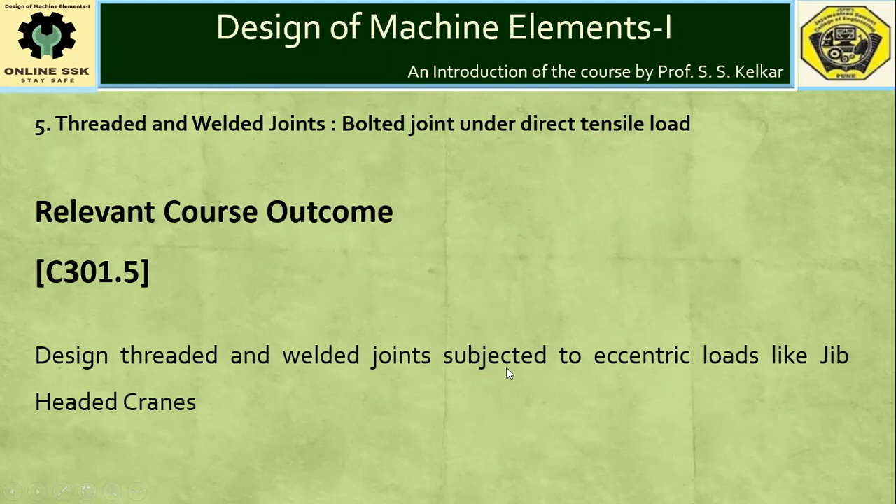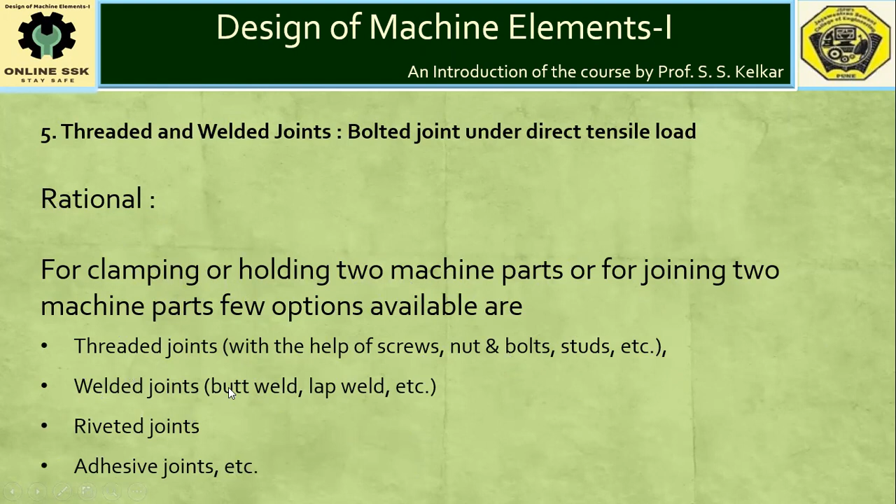Now, as far as joining of two machine parts is concerned, if we want to clamp or hold two machine parts together, there are a number of options. Famous of those are threaded joints, welded joints, riveted joints or adhesive joints. Nowadays, adhesive joints are getting popularity, but threaded and welded joints are the most common ways to join, hold or clamp two machine parts together.

Threaded screws are used for two different purposes. One is the power screw to apply the load, to sustain the load, or to lift the load, or to convert rotational motion into translational motion. This is covered under unit number 4, comprising power screw applications.

Whereas threaded screws are also used for joining or clamping two machine parts together. For that, threaded screws in the form of nut and bolts, studs or screws are used, and that is called threaded joints. Here, a stud can be considered as a bolt having no head. If no head is provided, then the bolt itself will be termed as a stud.

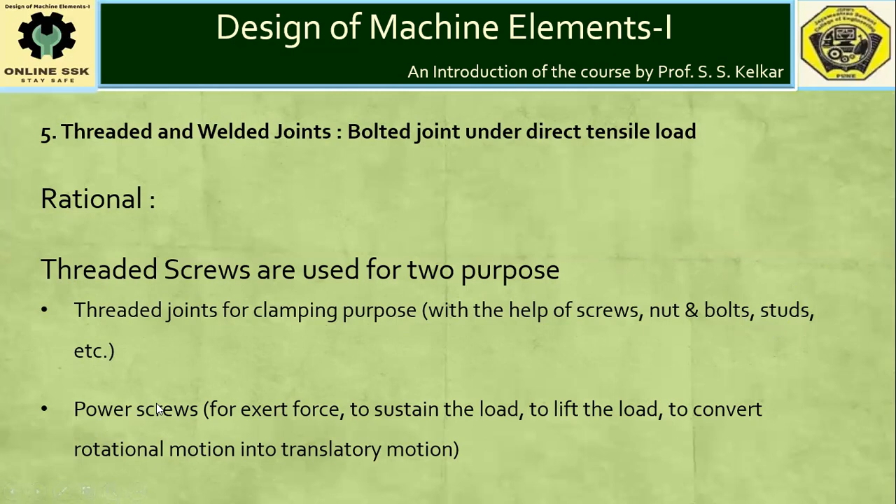As far as unit number 5 stipulated in our university syllabus, they have stipulated four different types of threaded joints: eccentrically loaded bolted joints in shear, eccentrically loaded bolted joints wherein the eccentric load is perpendicular to the axis of the bolt, eccentrically loaded bolted joints wherein the eccentric load is parallel to the axis of the bolt, and bolted joints subjected to tensile loads.

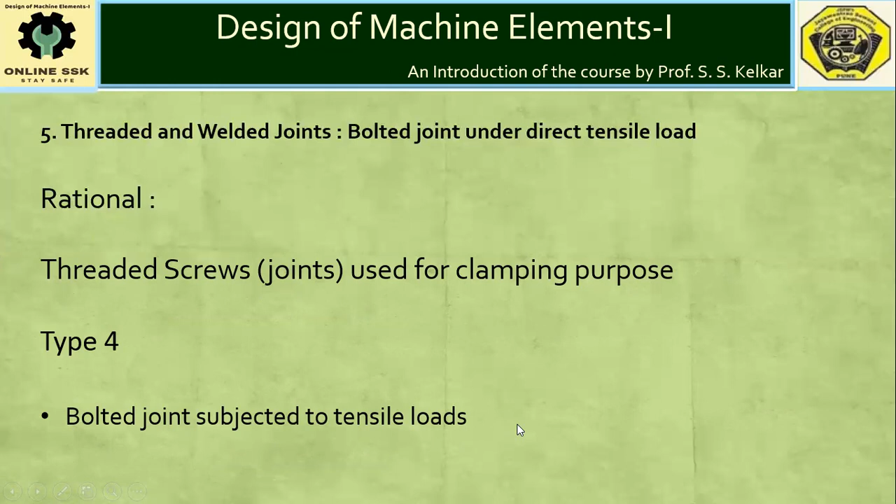This fourth type we are going to discuss in today's video tutorial. Type number 4, bolted joints subjected to tensile loads. How to analyze a bolted joint subjected to tensile loads, that we are going to discuss today.

Bolted joints are very common. If we say bolted joint, the very first figure that comes to mind is the joint required to join the flange of the cylinder with the head of the cylinder. The head and flange of the cylinder are joined with the help of a bolted assembly. A number of bolts are used over the periphery of the cylinder head, and this bolted joint assembly is used.

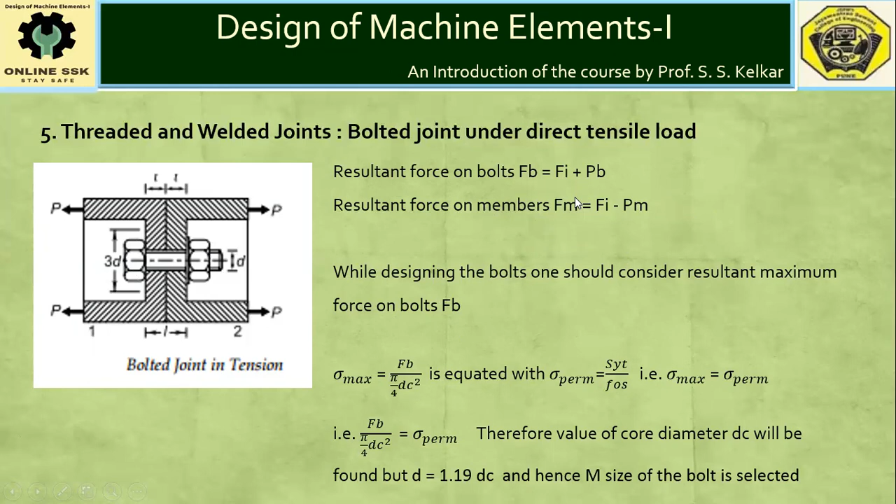Fm should always have some value in negative, because of compressive force. Resultant force on the members Fm should be non-zero. Rather, it should be of compressive nature. Fm should not be equal to zero. The moment Fm becomes equal to zero, that is the condition of separation. So for separation, Fm has to be equal to zero.

That means the moment at which Fi, initial load of compressive nature on the members, becomes equal to Pm, tensile load share of the members, there will be separation, there will be leakage. So the separation condition is signified by Fm equal to 0 or Fi equal to Pm.

Now, based on this, we can ensure that there is no separation and there is a leak proof joint. Also, using this condition, we shall be in position to predict the external force required to cause separation of the members. As the external force will increase, Pm will go on increasing, and the moment Pm becomes equal to Fi, there will be separation. So whatever is the external force at that time is called the external force causing separation. That's why it is called separating force, and it is denoted by Ps.

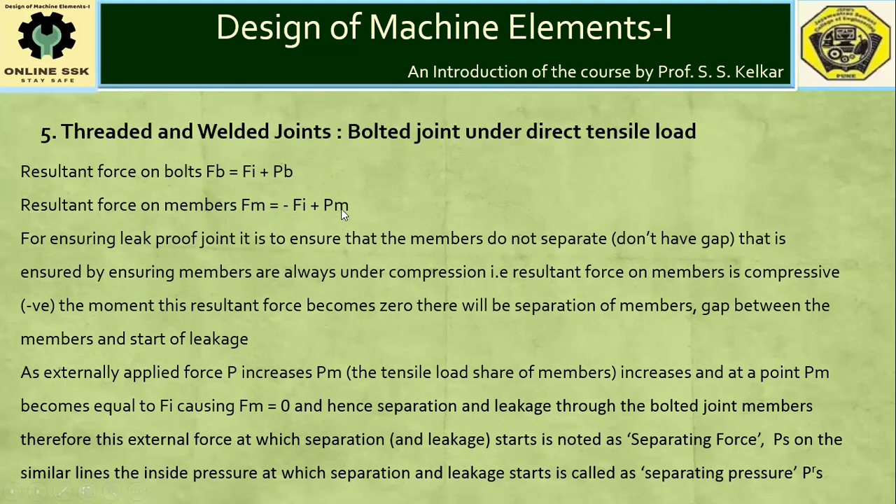Ps is the external force at which separation starts. That means Ps is the external force which causes Fi equal to Pm. Now here we were talking about the load share of the bolt as well as load share of the members. How to calculate load share of the bolt and the load share of the members?

For that, the formula for calculating load share of the bolt is Kb upon Kb plus Km times P, where P is the external force. Load share for the bolt is given by Kb upon Kb plus Km, where Kb and Km are the stiffness of the bolt and stiffness of the members: stiffness of the bolt divided by stiffness of the bolt plus stiffness of the member. Km represents stiffness of the members, Kb represents stiffness of the bolt.

This division Kb upon Kb plus Km is denoted by, say, the letter constant C. So the load share of the bolt is given by C times P, where P is the external load, Pb is the load share of the bolt, and C is the constant indicating the ratio of Kb to Kb plus Km. On similar lines, one can find the load share for the members Pm as given by Km upon Kb plus Km times P, where P is the external load.

Now, if Kb upon Kb plus Km is indicated by C, then obviously Km upon Kb plus Km will be indicated by 1 minus C. So therefore, Pm will be indicated as 1 minus C times P, where C is Kb upon Kb plus Km. Kb and Km are indicating the stiffness of the bolt and the members.

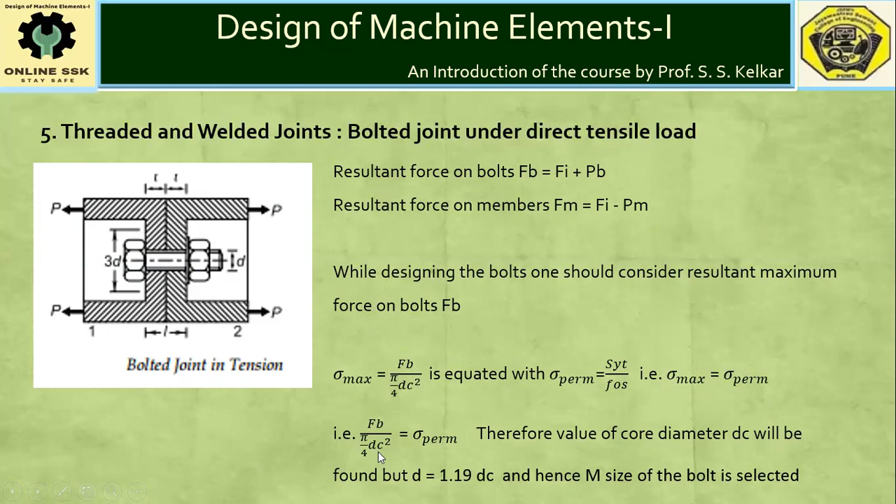For calculating Kb, we need to take into account the cross-section area of the bolt, the modulus of elasticity of the bolt material, and the effective length of the bolt. Here the cross-section area of the bolt is calculated based on the nominal diameter, not the core diameter. While equating maximum induced stress with permissible stress, we had considered the core diameter, but in the formula of Kb we are taking into account the nominal diameter d, pi by 4 d square. Eb is the modulus of elasticity for bolt material. Lb is the effective length of the bolt.

Effective length of the bolt is nothing but the summation of thicknesses of the members held together using the bolt. Effective length of the bolt will be equal to thickness of the head plus thickness of the gasket plus thickness of the flange. So here T1 plus T2 plus T3, this summation will indicate Lb. Here you can see this cylinder head having thickness T1 and flange having thickness T3, and the gasket in between is having thickness T2. These three members are held together using this bolt.

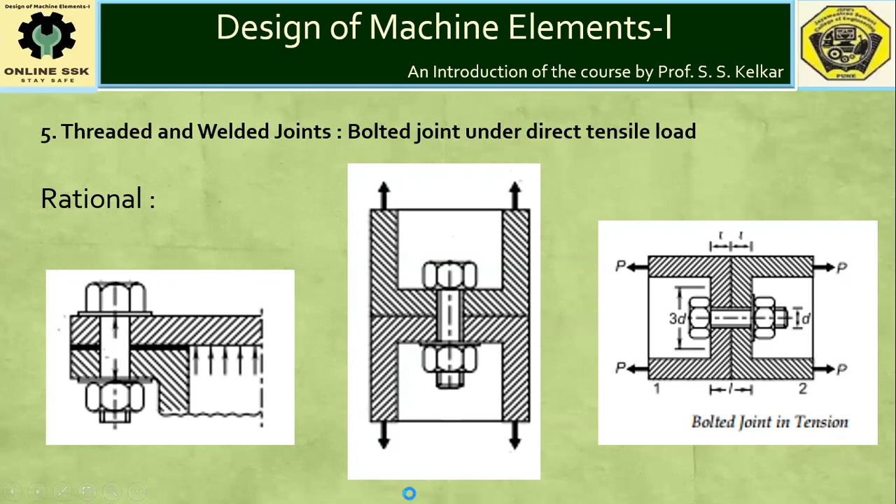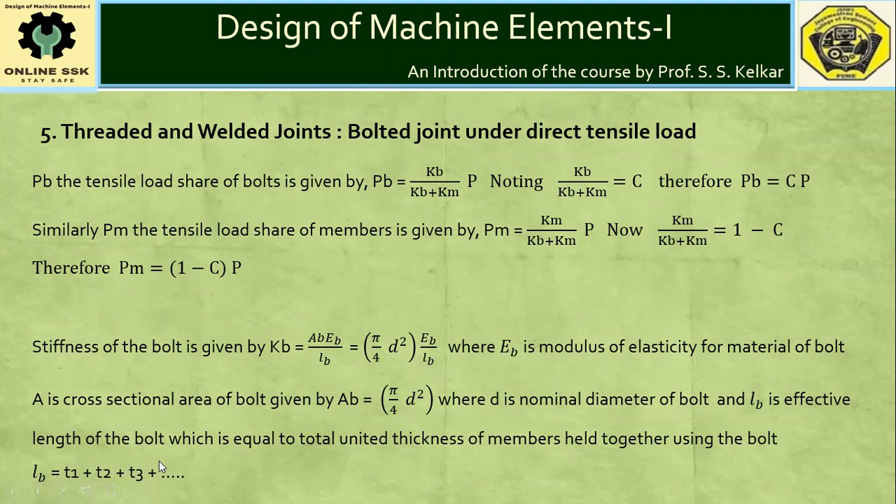Therefore, effective length of the bolt will be given by T1, thickness of the head, plus T2, thickness of the gasket, plus T3, thickness of the flange. So in the formula of Kb, this Lb indicates effective length of the bolt. It is nothing but the thicknesses of the members held together using the bolt.

As far as Km, the stiffness of the members, is considered, we know that a number of members are held together, and the effective stiffness of these members is given by 1 upon Km is equal to 1 upon K1 plus 1 upon K2, etc., where K1, K2, etc. are the stiffnesses of the individual members held together using this bolted joint. So here the reciprocal of the effective stiffness is given by summation of reciprocals of individual stiffnesses. These stiffnesses are in series combination, and whenever stiffnesses are in series, we have to add their reciprocals to find the reciprocal of effective stiffness. The same consideration is used here.

The united effective stiffness of the members Km will be given by 1 upon Km is equal to 1 upon K1 plus 1 upon K2, etc., where K1, K2 are the individual member stiffnesses. These are given by K1 equal to 2 pi d square E1 upon T1. K2 is equal to 2 pi d square, which is common as in case of K1 or K3, E2 upon T2. Please note that here the nominal diameter of the bolt is used.

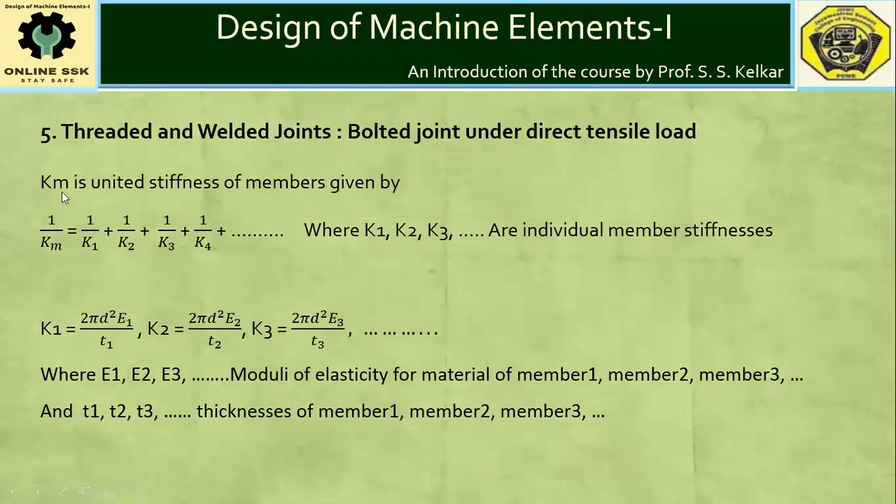E1 is the modulus of elasticity for member number 1. E2 is the modulus of elasticity for member number 2, and so on. And T1, T2, we have already discussed; those are the individual thicknesses of the members. So with this much information, we can proceed to solve one numerical, wherein the idea will be much clearer. Let us solve one numerical.

Here, as shown in the figure, the cylinder head is fixed with the flange using 8 identical bolts made up of steel grade Fe 400. Internal pressure of the working fluid is 1.2 Newton per millimeter square.

The initial tension inside each bolt is 10 kilonewton. We have to find size of the bolt using factor of safety as 2.5. Also, we have to find out separating pressure: the pressure inside the cylinder which will cause separation of the members, which will cause leakage from in between space

of the members. Also, they have specified thicknesses: thickness for the gasket as 5, thickness of the flange as 24, thickness of the head as 24 again. Modulus of elasticity for the bolt material is 210 gigapascal. Now we know 210 multiplied by 10 raised to 3 Newton per millimeter square, because 210 gigapascal is nothing but 210 multiplied by 10 raised to 3 megapascal. Megapascal is Newton per millimeter square. So EB is equal to 210 into 10 raised to 3 Newton per millimeter square.

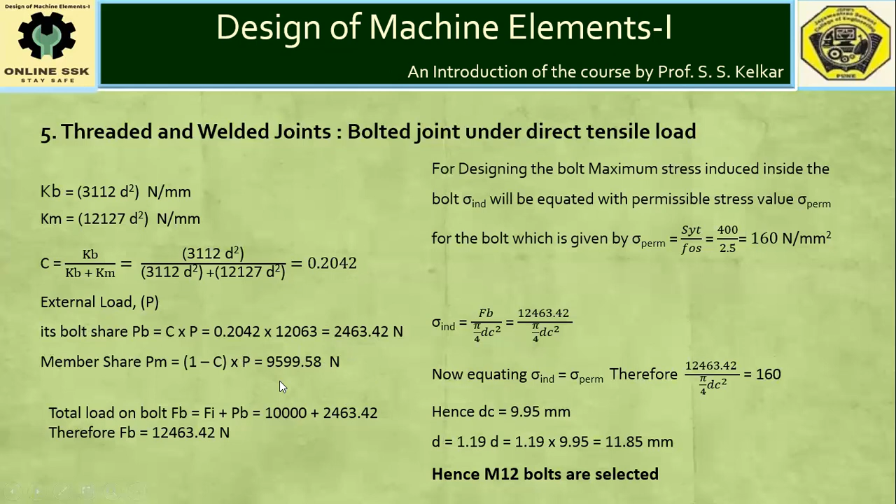2463.42 Newton. External load on the bolt is known to us. It is 12063. Out of 12063, 2463 Newton force will be utilized for causing further elongation of the bolt, and remaining 9599.58 Newton force will be utilized for relieving the initial compression of the members.

So total load on the bolt FB will be given by Fi plus PB. Value of Fi is 10,000 Newton. PB right now calculated 2463.42. So total force on the bolt is 12463.42 Newton. Now we have already seen SYT value for the bolt material is 400, factor of safety is specified as 2.5. So sigma permissible for the bolt material is 160 Newton per millimeter square.

Induced stress inside the bolt is given by FB upon core cross section area pi by 4 DC square. Please note that here DC is used. So induced stress inside the bolt is FB upon pi by 4 DC square. It will be equated with permissible stress of the bolt material. Sigma induced will be equated with sigma permissible. While equating, DC is the only unknown, which will have value of 9.95.

Multiplying this DC by 1.19, that will indicate value of D. The nominal diameter required for the bolt is 11.85 millimeter. Therefore, we are going to select next standard M value, that is M12 bolts for this bolted assembly. We should use 8 number of M12 bolts for assembling the cylinder head with the flange using a gasket in between.

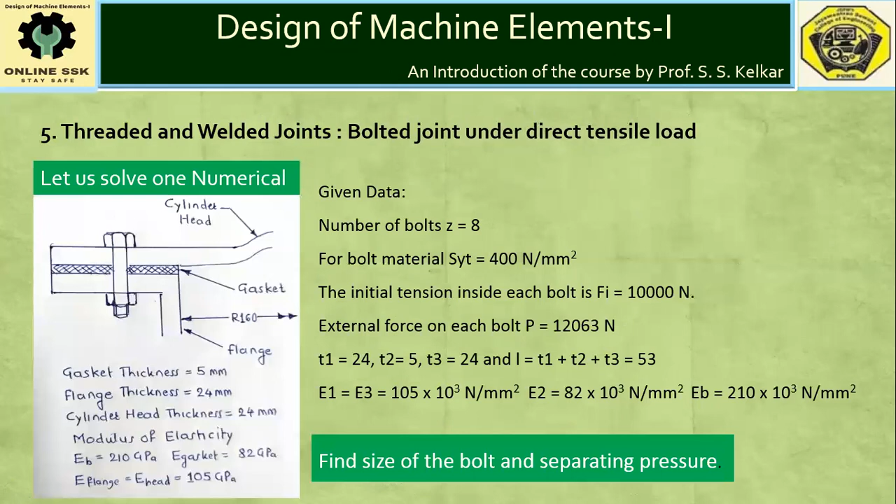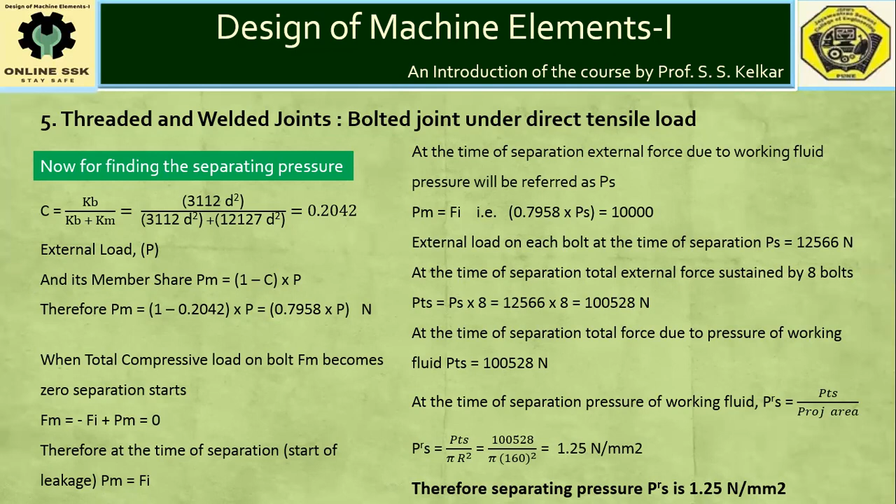Now, in this way, a bolted joint subjected to tensile load can be designed. Here we have seen how to design the bolt, that means how to find out the diameter or size of the bolt, and also we have predicted the separating pressure or separating force, the external force at which there will be separation of the members and failure of the joint. So in this way, one can analyze a bolted joint under tensile load.

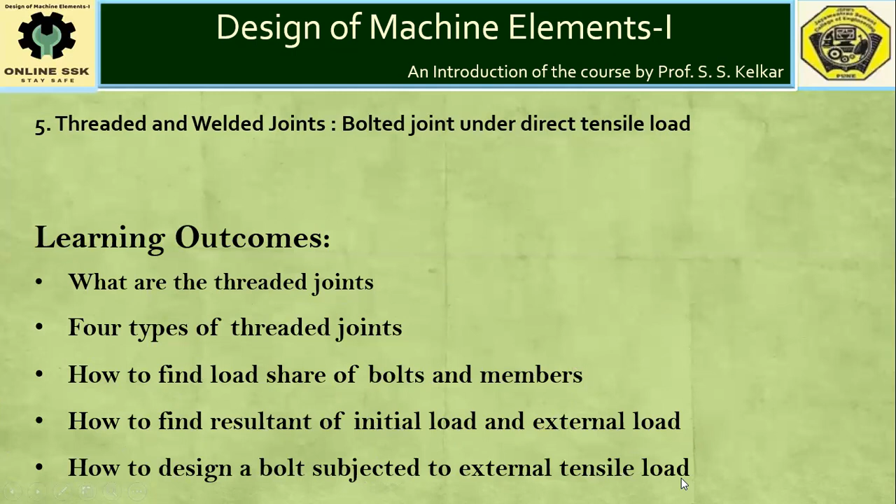During today's video tutorial, we have seen what are the threaded joints, the 4 different types of threaded joints, how to find out load share on bolts and members, PB and PM, and the resultant of initial load and external load. That means FB is equal to Fi plus PB, Fm is equal to minus Fi plus PM. And also we have analyzed and designed bolted joints subjected to external tensile load. So that's all in this video tutorial.